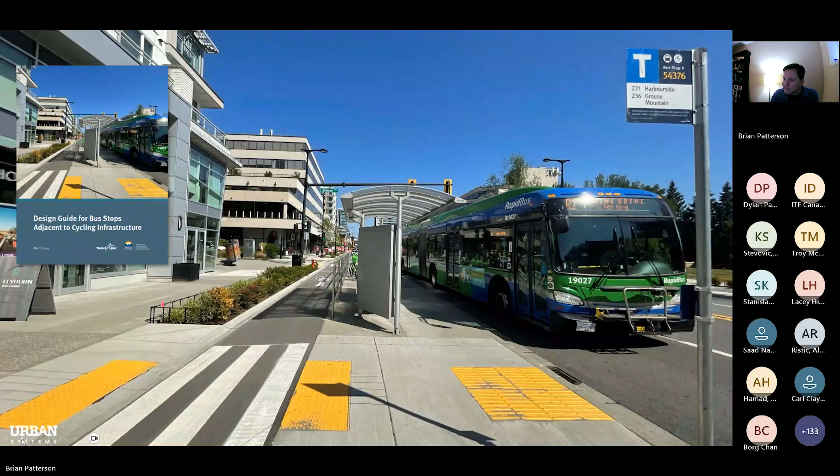As planners and designers, we recognize that transportation systems need to meet the needs of people with a diverse range of physical, cognitive, intellectual, psychological, and sensory abilities. This has led to the growing implementation of cycling infrastructure intended for use by people of all ages and abilities, including children, seniors, and people with disabilities.

As I mentioned, this has resulted in the implementation of island platform bus stops across Canada. But as noted, this has introduced complex challenges and created barriers for people with disabilities, including people with sight loss, but all types of disabilities.

Part of the impetus for the design guide stems from a 2020 decision by the BC Human Rights Tribunal, which determined that by installing island platform bus stops, there was a complaint against the City of Victoria, and the ruling was that the City of Victoria discriminated against the complainant and members of the Canadian Federation of the Blind who were looking to use transit in the City of Victoria.

There were a number of key issues raised in that ruling. The two main issues were concerns that people with sight loss were not able to reliably sense if a cyclist was approaching, and secondly, that people with sight loss don't have certainty that a cyclist has stopped. Those were the two overarching issues through that ruling.

Essentially, with the design of island platform bus stops, the complainants were saying that their ability to use transit had been taken away because people were so afraid to cross the bike lane to access the bus stop.

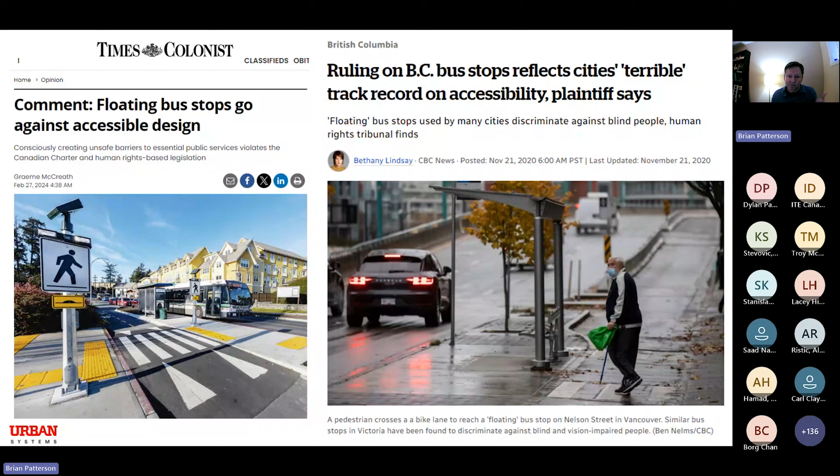In response to that ruling, the City of Victoria was directed to install pedestrian-controlled audible flashing lights. But the ruling recognized that this was not the full answer. It responded to this particular case, but this is why the design guide was needed, so we could look at this in a more comprehensive manner.

When we're looking at why this is needed, we often hear: why are they needed? Can't buses just stop curbside like they currently do? Can't we just drop the bike lane? But I think the reality is we do need to find solutions that work for everybody, including people with disabilities and people who cycle.

This is an example here. I was cycling with my son last year, and there was a bus stopped here. Our options without an island platform bus stop were to either wait for the bus or weave into traffic on a busy arterial road, which isn't safe, particularly for children or for people who aren't comfortable cycling. So we're trying to find solutions that work for everybody.

So the design guide—again, we won't provide too much discussion on the design guide itself, but a quick summary of what was included in it.

It included a wide range of treatments. There were 45 recommendations overall to address a number of issues and challenges. You can see some photos here, things like tactile directional indicators, secondary bus stop ID poles, having enhanced signage, and then some optional treatments like actuated flashing beacons or RRFBs.

So we had a number of different typologies or configurations for island platform bus stops, and for each one we identified some core or required treatments, and then some optional treatments, which might be things you would consider in areas with higher risk or higher conflicts between people cycling and people trying to access transit. So it provided, I think, a pretty comprehensive toolkit of options for practitioners to consider.

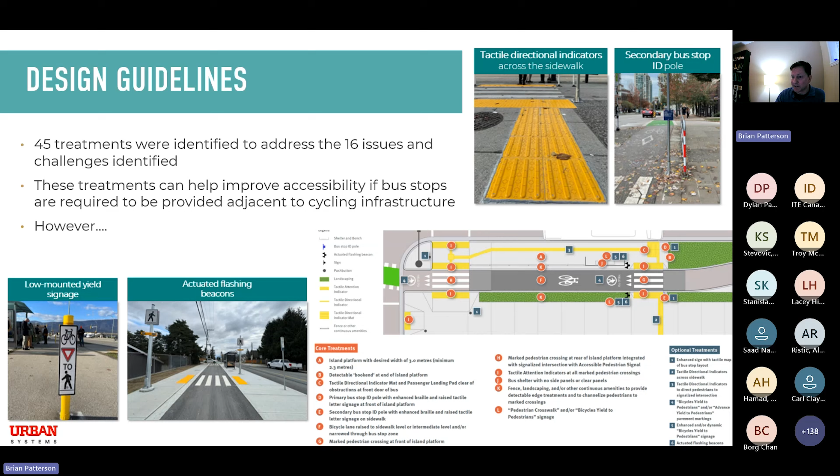However, the study, as I mentioned at the outset, did not fully address all of the issues identified. And the elephant in the room I spoke about is that there really are still two key issues remaining, and these came out of that HRT ruling in 2020. That involves really having certainty for a person with sight loss, knowing if a person cycling is approaching, and knowing that that person cycling has stopped.

So while the design guide provides a range of tools to help improve behavior and compliance, those two key issues still remain outstanding. The guide acknowledged that and recognized it's a first step, but that further research and pilot projects are required to learn more, to test out new technologies or new ideas, and to see how we can address these issues among others.

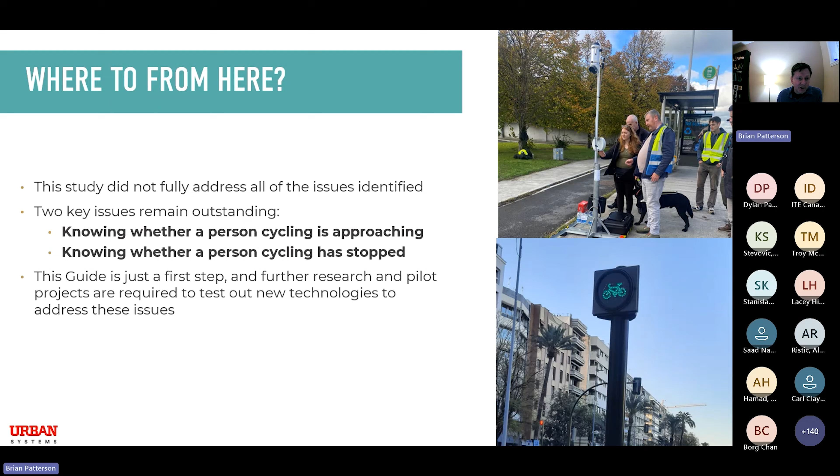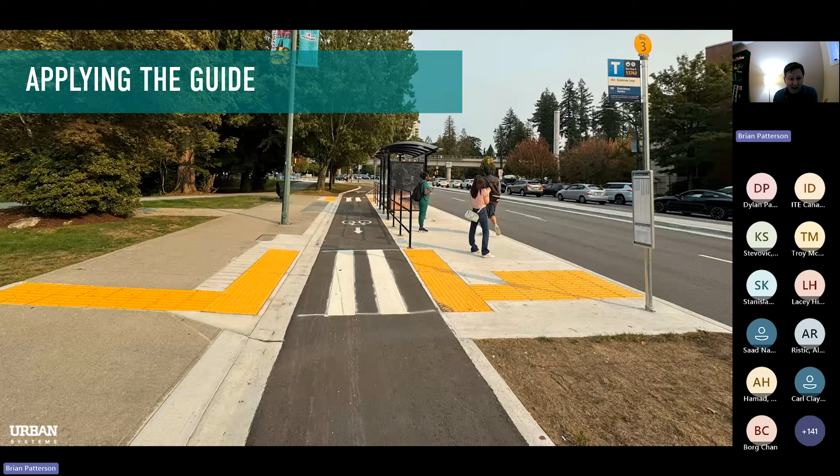So lots of great elements, and kudos to the city of Coquitlam with this design. We've seen a number of other similar examples taking the spirit of the design guide. But when it comes to some of the other emerging ideas and technologies that are out there, this is a question we want to explore throughout this webinar.

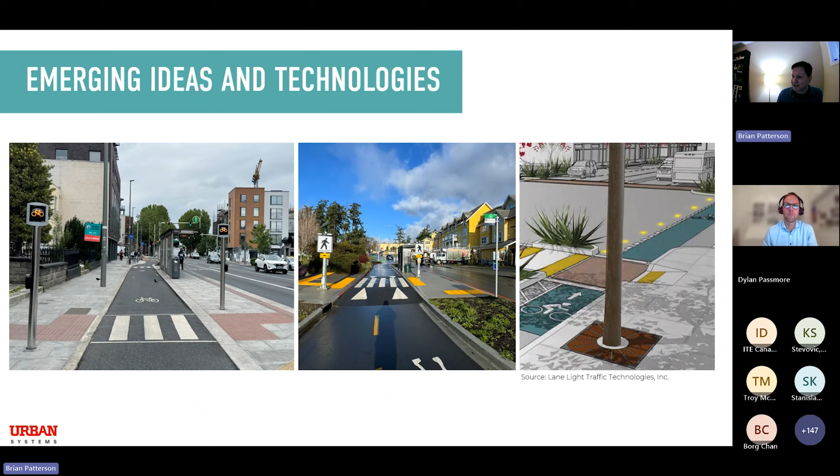Or there's flashing actuated beacons, or RRFBs, which again came out of the HRT ruling. And then a number of other ideas that some communities are exploring. I haven't seen them in practice yet, but things like inlane lights or dynamic or enhanced flashing signage. So there's consideration for some of these technologies, but maybe an overarching question is: is this too much, or are we over-engineering or over-designing with some of these types of technologies? These are things that, again, we're learning as we go.

So before passing it on to our panel of speakers, some of the ideas we'll be exploring through the webinar today in each of the various presentations include learning about what the latest research says, what we've learned from people with disabilities through engagement, and recognizing that engagement continues to be really important. Even though we have the design guide now, that doesn't replace the need to engage with people with lived experience through the planning and design process. We'll be talking about context-sensitive approaches, particularly with some of those optional treatments: how do we address conflicting needs, and how have designs evolved to reflect lessons learned?

What is the role of technology, like bicycle signals or RRFBs? Looking at education and awareness, and broadly, what guidance is still outstanding or still lacking. So those are some themes we will be exploring.

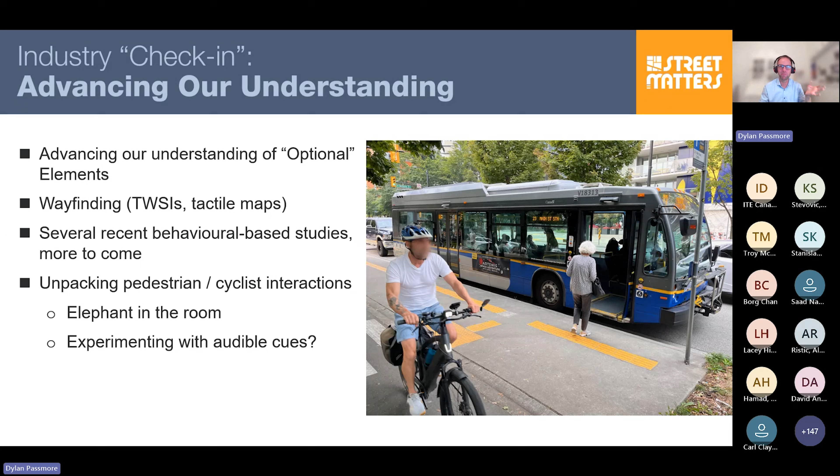In the guide, we were really putting a spotlight on the importance of edge delineation, of defining space maybe better than we have in the past. With that, also talking about designated crossings, how to deal with those, mark them, but also providing the appropriate warnings. That basket of design thinking is getting more and more traction. I'm seeing more and more designs out there these days, like Brian was showing, that are clearly paying attention to those nuances.

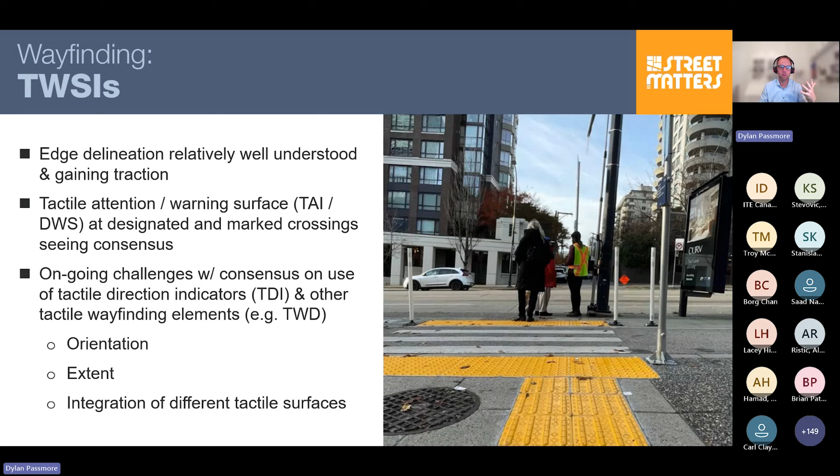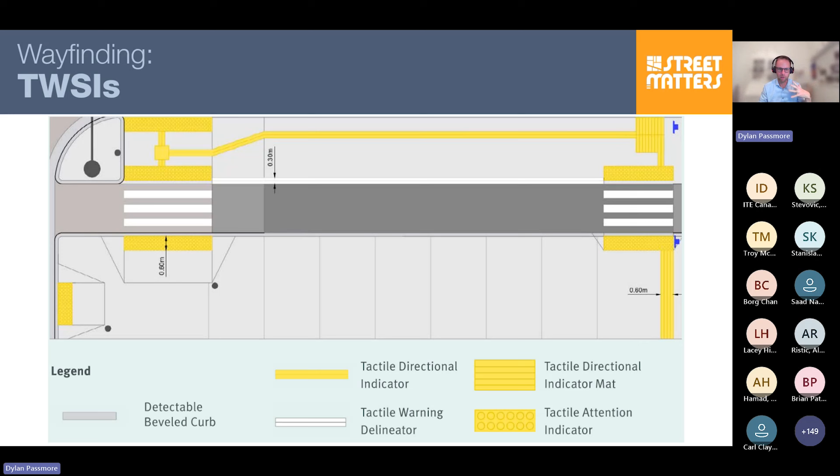I'd say the space that is still kind of up in the air and we're still trying to figure out relates to a lot of the other basket of tactile features, particularly direction indicators, which we talked a bit about in the guide, but how to, in a North American context, orient them and how extensively to use them. There's not just the directional indicators, but others like the trapezoid developed down in San Francisco a couple years ago. We talked about all of this in the guide, but framed it up as optional. It's really an area that's still unfolding, and I still see a lot of challenges with leveraging these tools. So I'll leave it at that.

The other wayfinding piece that we floated in the guide and tested out a bit through the pilot studies was this idea of tactile layout maps installed on the bus ID pole. Not talking about Braille, bus stop number and route information, but something that actually communicates the layout of the stop in a tactile way, because they vary hugely.

Our feeling at this stage is that it's been received as an interesting idea, but with kind of lukewarm reception, I'd say. On the user side, we struggled a bit to come up with something tactile, like a tactile language, that explains the layout in a simplified way that wasn't too complex, but it's a new language, so it takes a bit to understand these panels. Then on the practitioner side, it creates a real challenge in terms of asset management. Every single one has to be custom designed and maintained. If it gets vandalized, or the location of the sign and its orientation is really important, any changes to bus stops, which can be pretty frequent, require a new sign. So there's that practicality to it as well.

The other thing I want to touch on is this idea of a typology of different stops, which we included in the guide. We call it the conventional island platform, where you've got a platform that's sort of full width - not in this image, but often the shelter would be located out on the island, and there's enough room for a ramp to deploy from the bus, and someone using a wheelchair to access that ramp.

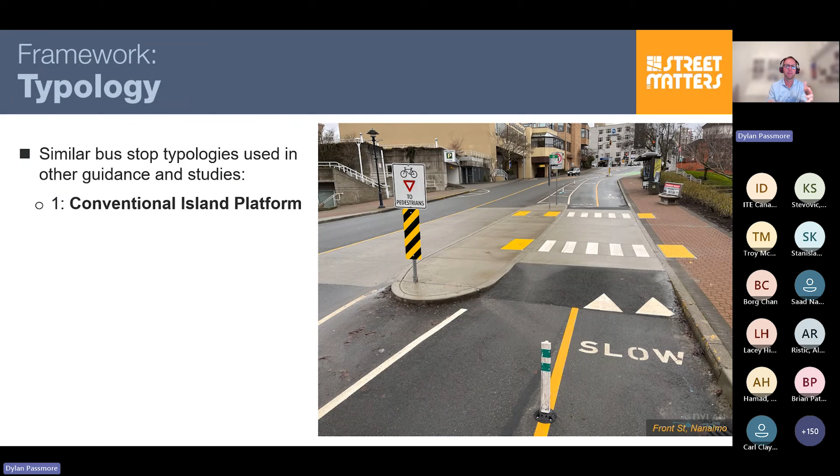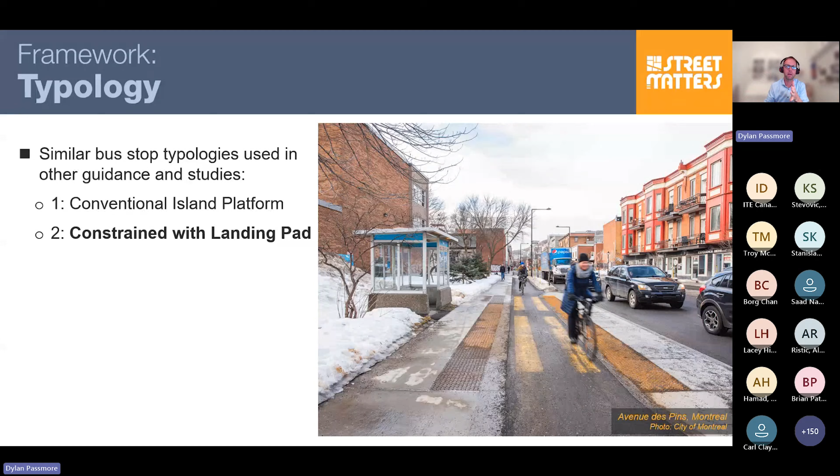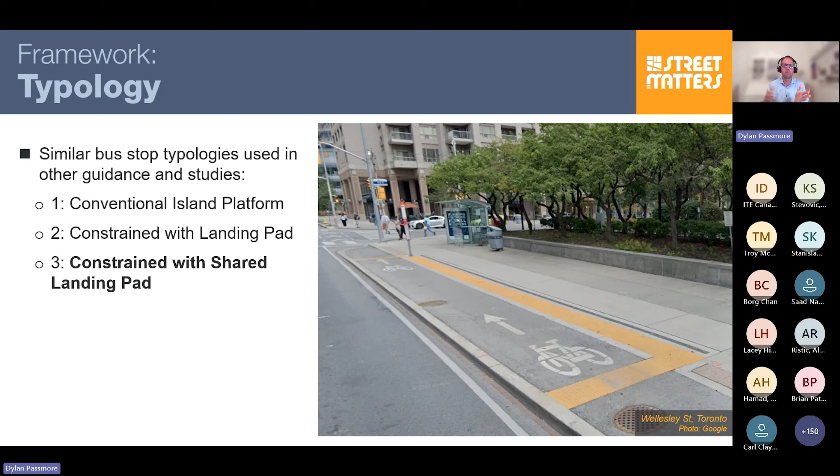So there's that. Then there's more constrained scenarios, which is an example from Montreal. Bartek's going to talk about that a bit later, but where you only have space, say, for a step-out area, or the ramp to deploy from a bus, versus an uber constrained scenario, like you see many of these around Toronto, or Copenhagen for that matter, where someone stepping out of the bus is stepping into a raised protected bike lane, and vice versa, versus integration of a stop with a multi-use path.

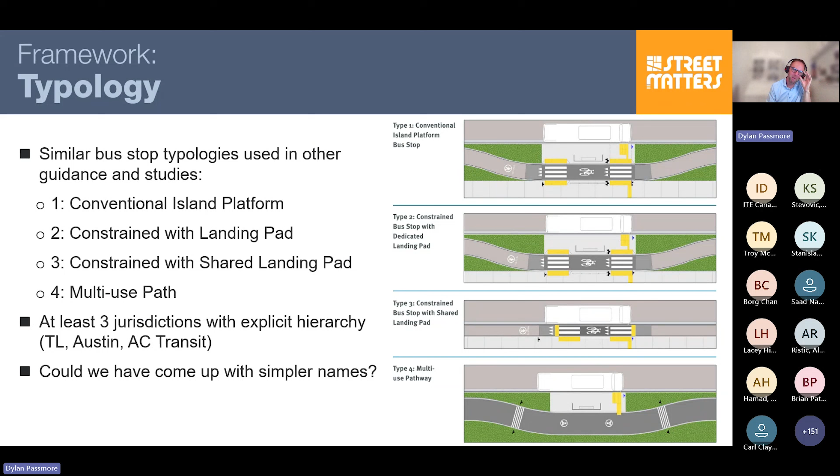And these broad four categories, that's how the guide was framed up, but we're also seeing very similar typologies used in other design guides, and even research and studies are often framing up findings with a very similar typology. And so I also really feel like this language, or this understanding of how we talk about island platform stops or floating bus stops, there's a bit of a consensus growing that these types are pretty fundamentally different from each other in terms of how we think about how to design them, and also about how people use them. I'll just say in the guide we probably could have come up with better names, simpler names for these types, but I'll get to that in a second.

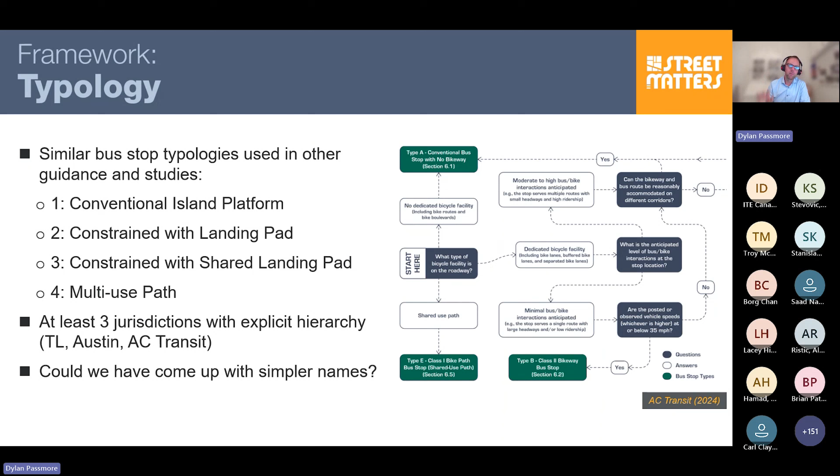So I'm just going to also touch on a few interesting studies that came out right around the same time as the design guides. The first one I want to mention is at Massachusetts DOT. They funded a look at a bunch of floating bus stops. They were looking at LiDAR data to track movement and speeds in the area. And one of the initial observations they made is a lot of the stops out in the field today don't look alike. There's a lot of inconsistency. And so interestingly, they framed their findings around a really similar typology. They just called it full width platform versus partial width platform versus no platform at all, i.e. the Toronto scenario I was just talking about. So similar typology to the TransLink guide.

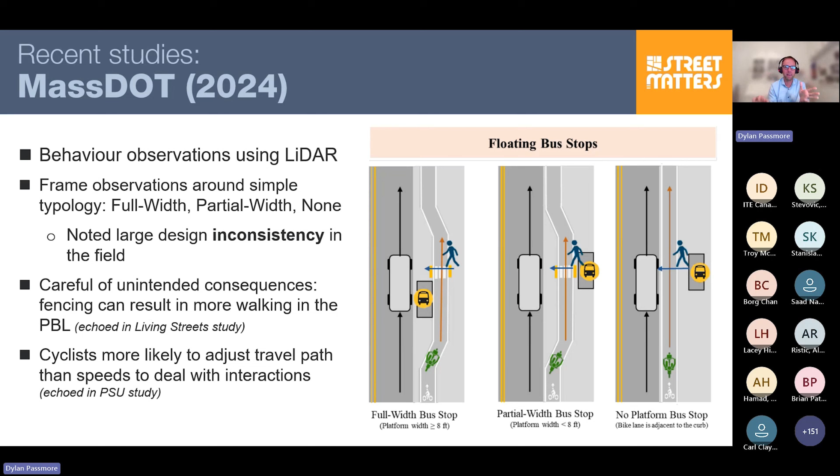Just a couple things that I thought were interesting coming out of that. One was they were noticing a lot of the stop designs that had a lot of fencing and those kinds of obstructions were resulting in a lot more walking in the protected bike lane. This is echoed in a Living Streets study I'll talk about in a second. And the other thing they were noting is that cyclists were much more likely to adjust their alignment, their travel path, in dealing with interactions with pedestrians than they were their speeds. So that's touching on a little bit of the complexity of the behavior that we actually see at these bus stops. So that was echoed by a Portland study here.

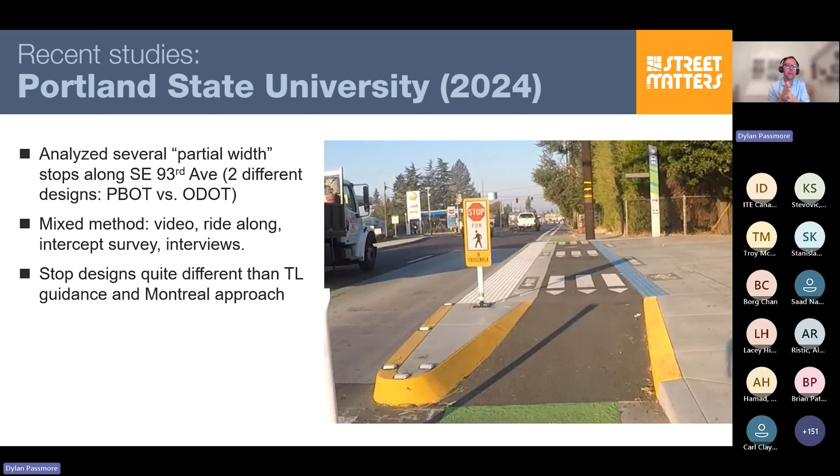So I'll just talk briefly. There's an interesting PSU study that also came out around the same time. They looked at a single corridor with a bunch of stops, and they were all this kind of partial width type. If you look closely, it looks a little different from the Montreal case. Oh, and the other thing that was kind of interesting, this corridor actually crossed a jurisdictional boundary. So this was what a bunch of the stops looked like, and this is what a bunch of other stops looked like. So half of them were city design, the other half were state design.

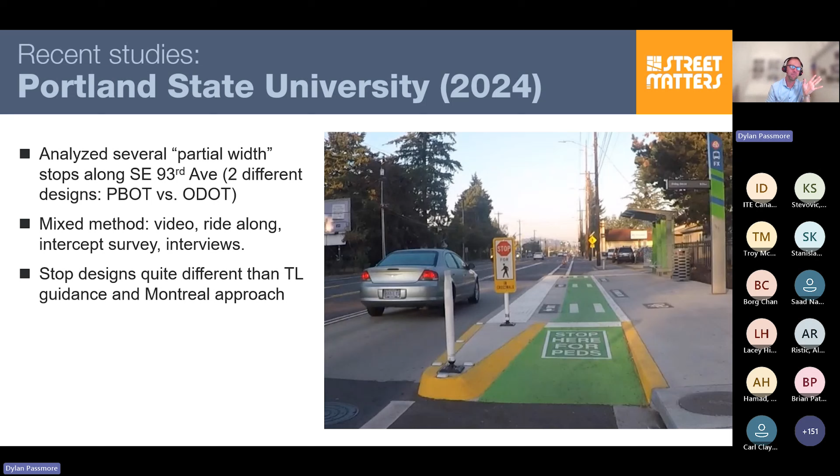But anyway, one really interesting thing for me that I've been wondering about for a while with this type is where are people waiting and standing? And that was one of the big findings here, that people were in fact waiting in the sidewalk area where the shelter and bus ID pole, all that transit furniture, is located. So that for me is good and reassuring, because that was certainly the intent with how we framed it in the TransLink guide.

Another thing was the bus operators were observing people with mobility aids sometimes struggling with the TWSIs, traversing them. That's also something that was really back of mind for us when writing the guide, and sort of a cautionary note with ideas of really blanketing these platforms with especially directional indicators, that there might be some trade-offs and some impacts for people with mobility needs.

And then the other thing that was interesting to me, bicyclists were shown slowing down in response to their context. So, if there were a bunch of transit riders present, they noticed a drop in cyclist speed. If there was a big bus at the stop, the speeds drop. And so there is this kind of thing that happens, I think, at this type of stop, the more constrained, like that Toronto example, that's a little different from the full width design approach, where that bus, its presence is much more felt.

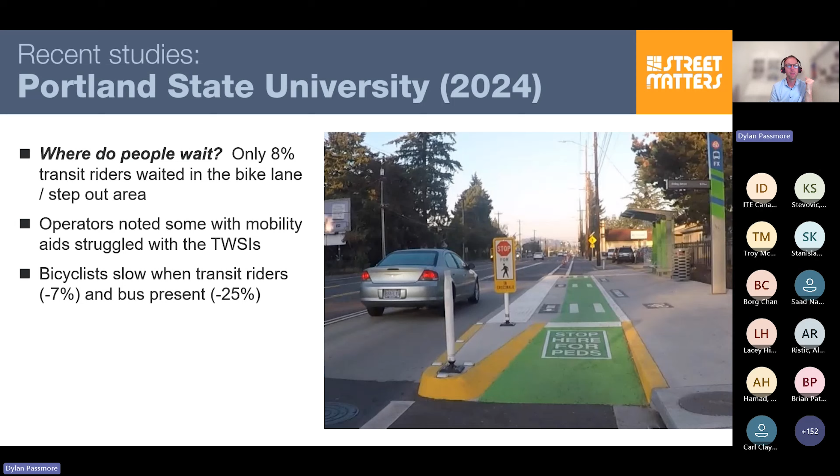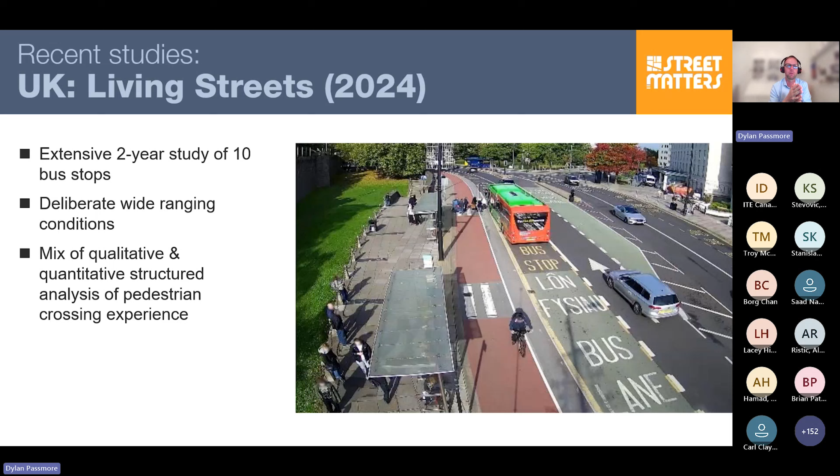Okay, pivoting to a UK study done by Living Streets, super interesting, rich study that happened over 2 years. They looked at only 10 stops, but did a real deep dive. Really interesting mix of qualitative and quantitative. Real quick, I think the thing that was interesting for me is they really did a good job of unpacking just how complex behavior is at these stops.

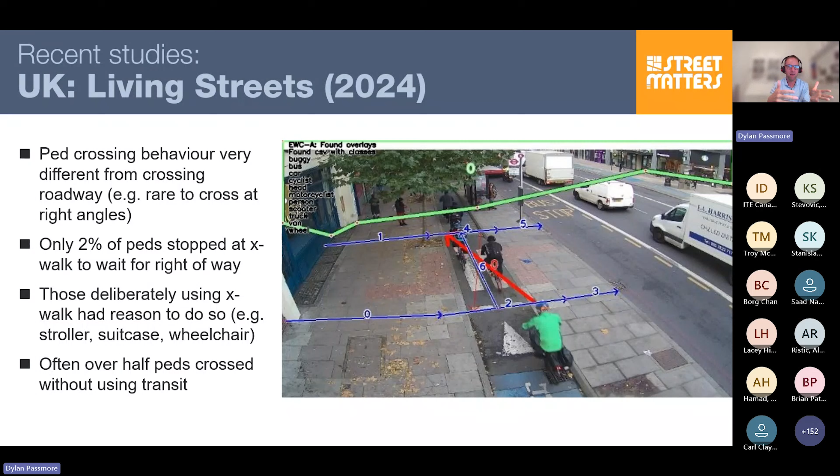And they highlighted that it's really rare to see somebody cross a protected bike lane at a stop like this in that sort of traditional use of a crosswalk that you would think of, someone crossing a roadway. Rare for someone to cross at right angles. Rare to see someone come up, wait, look for a gap, cross. And they included a bunch of traces in their report that really hammered that home, just how much complexity is going on here and just how complex the behavior is as a result.

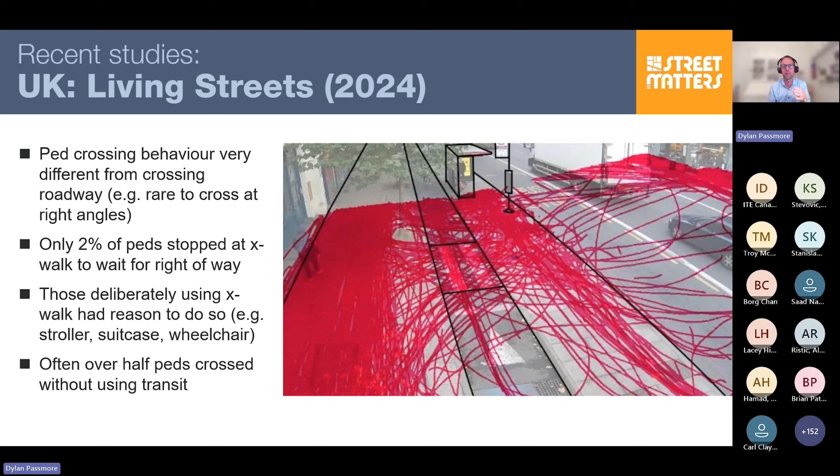They even noted that at a bunch of the stops, more than half of the pedestrians crossing the protected bike lane weren't even crossing to access transit. Of course, a lot of these stops are located near an intersection, and so they highlight one example where people are just interacting with the stop and the bike lane within the vicinity of the floating bus stop, but to cross the street or to have a look down the street. So that was, for me, a bit eye-opening.

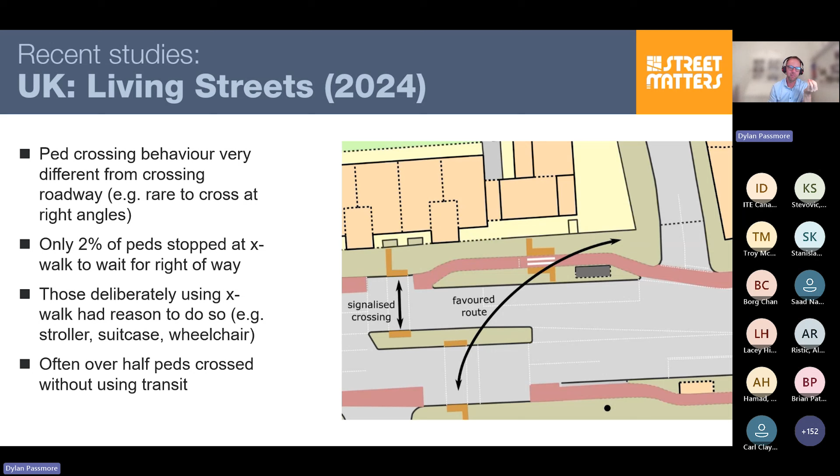And so one thing that they really underscored is just how much context matters. And they framed it as busyness and complexity being two features that really create unique conditions. Locations where we have really large volumes, frequent crowds of pedestrians, groups of pedestrians, say frequent transit service, pedestrians exiting shops, talking with friends, all that adds complexity. A two-way protected bike lane also adds complexity to pedestrians. And for a pedestrian with vision disability, this increasing complexity really compounds their struggles.

So the researchers tried to really carve out these busy and complex locations and suggest identifying those and treating those as a unique condition, but also super important by virtue of being really busy. And so I think for us as practitioners, maybe thinking a bit about identifying those locations, and maybe those are the locations where we really need to be talking about some higher order interventions, acoustic cues, beacon signals, all that stuff that Brian was starting to talk about. Maybe that's the context where those start to make sense.

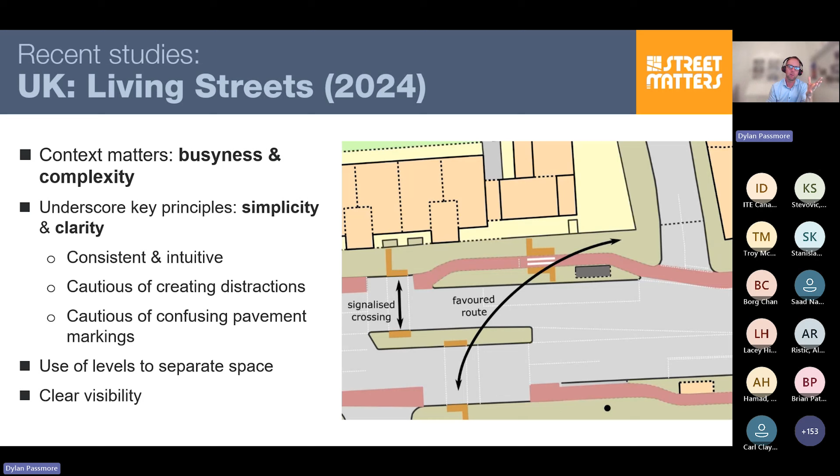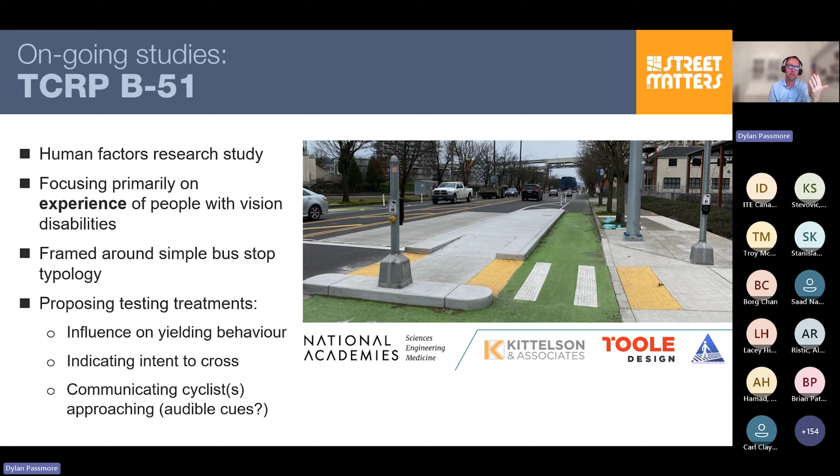Real quick, I'll just mention there is an early stages, but ongoing study right now, TCRP B-51. I'm involved in that, and it's really focusing primarily on the pedestrian experience, especially people with vision disabilities, and trying to test out a whole host of treatments to really unpack behavior, yielding, indicating intent to cross, those sorts of things. So stay tuned for that.

So I'll just wrap this up to mention we're aware there's a couple of cities, so City of Vancouver, that are looking at, does providing an audible cue have merit? Does it seem like that could have some benefits? So City of Vancouver are exploring some low-tech solutions. They've been calling it, I think, the clinker clanker. So something that could be installed in a bike lane, and you get the clank as somebody goes across it. And the idea there is something low cost, low maintenance, scalable. Of course, the trade-off with that is minimal control over volume and no ability to turn it on or off as needed, that sort of thing.

So we are aware of another jurisdiction looking at a more high-tech solution, and it might involve some kind of active or passive detection of approaching bikes, installing some speakers to make sound, maybe leveraging APS technology in a way that you could respond to ambient noise levels, maybe only activate the system as needed. Of course, the trade-off with that approach, though, is it's going to be more costly to install, harder to scale out across the city, and it's probably going to have some higher maintenance requirements.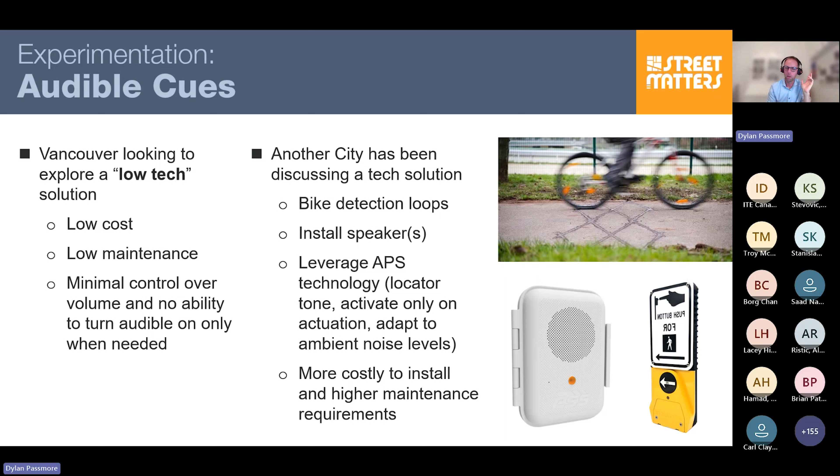So could talk about this a lot more, but I just want to let you all know that people are starting to think about these things and explore them, and I think it's super, super interesting. So I will wrap up with that. Thank you so much.

Great. Thanks, Dylan. Really appreciate that, sharing some of that research and showcasing the complexities that we're looking to address here, and really how it comes down to human factors and behavior, and it's very nuanced. So I'll pass it to our next speaker, Katarina Stevovic. She comes to us from TransLink, Metro Vancouver's multimodal transportation agency. Katarina brings over a decade of dedicated transportation experience in the public sector, and she currently manages the major road network in Metro Vancouver. And she'll be speaking to some key insights TransLink has had since the design guide was published. So over to you, Katarina.

Great, thank you so much. Let me just share my screen here. Okay. Give it a second. Awesome.

So thank you so much for those kind words and introduction. I have the pleasure to present all the work that we here at TransLink have done. I want to start with a quick overview of who we are at TransLink. We were created in 1999 as Metro Vancouver's Regional Transportation Authority. We oversee approximately 2,600 lane kilometers of the major road network. Within here, we encompass 23 local governments. We operate over 240 bus routes. We have 3 SkyTrain lines, 1 commuter rail, and a SeaBus. So we have a lot of good work that we oversee.

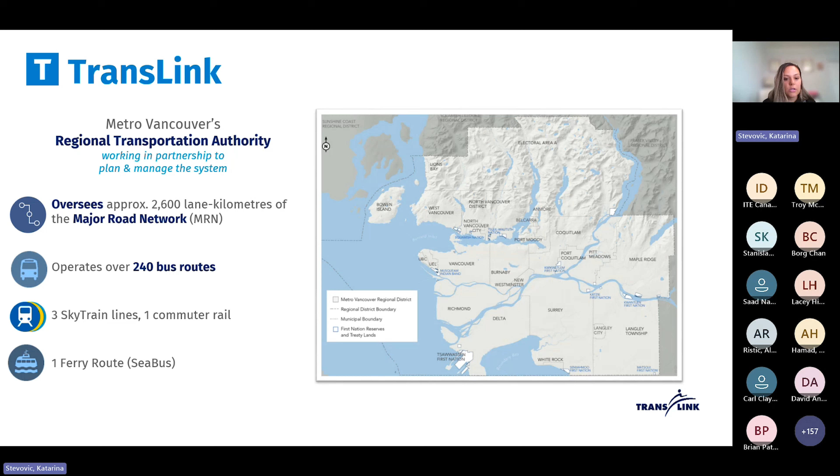So what have we really done since publishing the guide last April, and what does that really mean? Alrighty, so once the guide was completed, we really saw our role start transitioning. And this is really where a lot of the work started. As the guide was developed, there were some key themed areas for further work and development. And what we really wanted to focus on was getting consistency for how users would experience and expect to cross these facilities throughout the region. So if you're on a bus in one city or going to another, it should be roughly the same.

And with that, we saw that our role was really transitioning into facilitating and connecting all the dots. So we were working very closely with the local governments as well as our operating companies to help overcome some of the stuff. As Brian mentioned, this is not ideal. There's still a lot of work in progress when it comes to implementing and designing these features. So what we really worked on was making sure that all other design solutions were exhausted before this would be implemented. This is really key as a role to facilitate with our operating companies and local governments. So we would see if there were any opportunities for bus stop balancing, or a way to relocate some of the buses closer to intersections where it could be integrated with a signalized crossing instead.

And really, that is where we started noticing our focus on education and awareness. What we started noticing the most was if we don't start changing the behavior of what's expected here with this infrastructure, then it doesn't matter how good the design is, we'll still have some issues to overcome. And so what we ended up doing was working internally with our great marketing team to start really campaigning on the education portion. We piloted a couple bus stop announcements, which I'll get into, and also featured a good video where we were working with our local HUB, which is our cycling group as well.

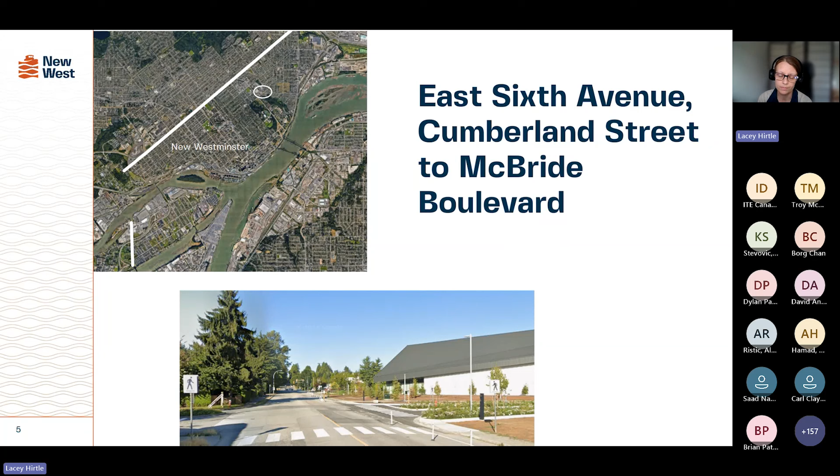This project came to be because the City of New Westminster had a civic facility called the Canada Games Pool that was being redeveloped into a new aquatic and community center, the Tommy Douglas... Aquatic and Community Center, which opened in 2024. Since opening, it has received the Rick Hansen Foundation certification for accessibility, as well as the Prix Versailles Award, so it's really a gem within the community.

One thing that's really important to the City of New Westminster is recognizing that one of the largest growing demographics in the city is older adults. So we have a real focus on making sure our civic facilities are as accessible as possible for all ages and abilities, which is foundational to this project.

This project is the offsite rebuild as part of the new Aquatic and Community Center, with a corridor length of approximately 330 meters. It entails traffic safety improvements, a new full signal at the intersection of Cumberland Street and East 6th Avenue, improving the existing transit stop outside the civic facility, and rebuilding a bidirectional bike lane.

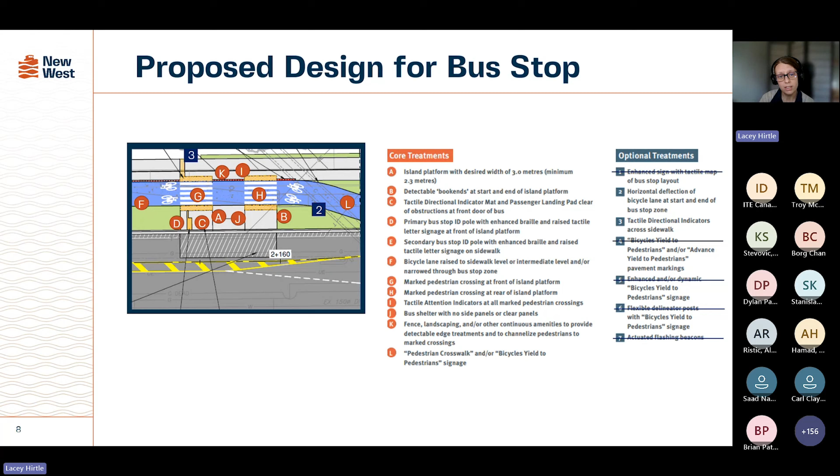What was different about this project is we were open for influence. So we had the proposed design, but we were open to being influenced about what that ultimate design would look like based on feedback from people with lived experience. So what did that look like for this project?

Well, we knew the primary concern, as Brian highlighted too, is that people sometimes can't hear cyclists approaching. But when we talked with CNIB, we heard that their primary concern was actually a behavioral piece—cyclists not being willing to stop and give right of way to people crossing the bike lane to get to and from the bus.

At this point I didn't really know how to do a site visit with people who have different abilities, so I reached out to a few colleagues, and we landed on hiring an orientation and mobility specialist. I got a crash course in what orientation and mobility specialists do—they're key to providing that comfortable, safe environment for people with different abilities to come out and be on site, feel comfortable, navigate the space, and provide feedback.

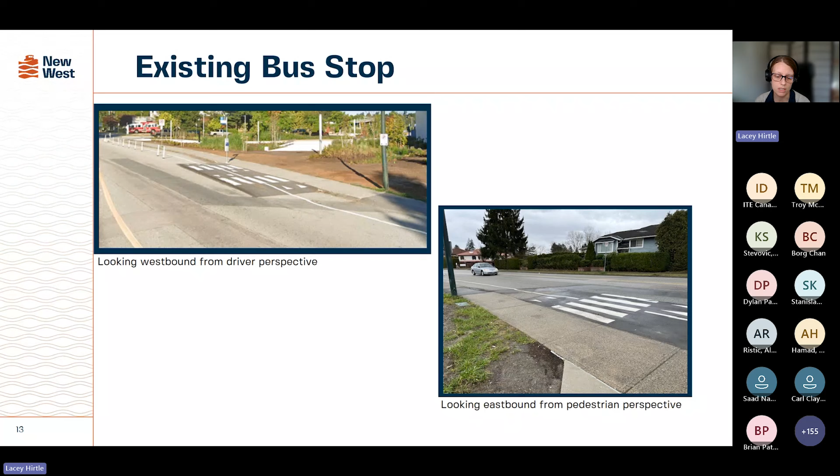I don't have a photo of the bus stopping here and deploying the ramp, but you can use your imaginations—the ramp, when deployed, blocks the bike lane, and cyclists do have to stop. This was the key point that was feedback for us during the design, and our consultant took this information away to create a tailored design based on this feedback.

I'm going to start in the lower left-hand side of the screen and go clockwise. The bus stop area and bike lane continue to overlap. The bike lane is raised through the bus zone, with horizontal deflection on the approach. We have a 3-meter bidirectional bike lane reduced to 1.8 meters through the bus zone area, meaning it's one-way for cyclists, and the right-of-way prioritizes pedestrians going back and forth.

Going clockwise, the transit shelter placement was really key, wanting it adjacent to the sidewalk that Katarina spoke to, about being consistent with where other bus stops are in the region. That was feedback we heard from community members. We also added a tactile indicator to provide direction to the civic facility.

You'll notice there's a small break in the tactile indication. That was because we heard from people who want to traverse the sidewalk east-west and don't want to have to go over it, especially if they're in a wheelchair. It just provides a more level of comfort for them.

You can see the delineation of the bus stop area with the concrete versus the landscape bookending. Lastly, from people with lived experience and orientation mobility specialists, we learned we did not need to provide tactile domes at the back door of the bus stop, since people are trained to only use the front door. So we focused those tactile pieces on the front door and the path to and from the facility.

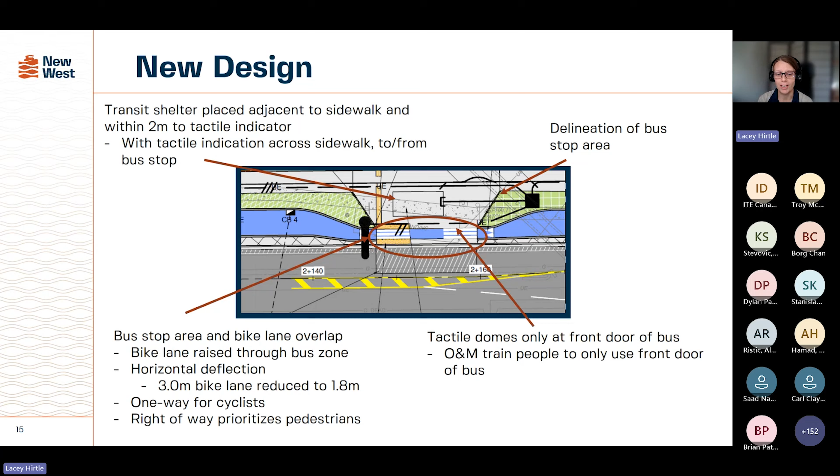That's been our experience in New Westminster. This project is set to begin construction this fall, and we'll be able to report back in the future on how that's going. Thanks.

Wonderful, thanks Lacey. Really appreciate the perspective on how you engaged with people with lived experience and how that informed the design, with some great lessons learned moving forward. It really echoes what's in the design guide we mentioned—the design guide shouldn't substitute engagement, it's a starting point to then engage and come up with locally based solutions. Some really great lessons learned there.

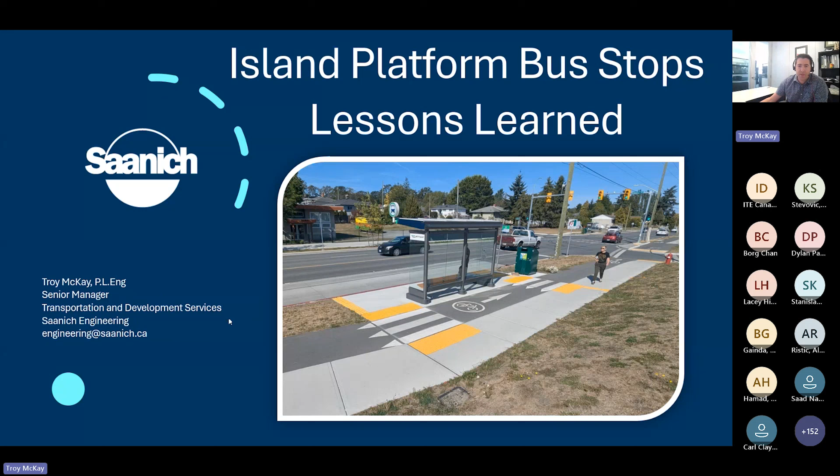Great, thanks Brian. Good morning, good afternoon for those joining from across the country. Pleased to be here to share our experience in Saanich, on Vancouver Island on the coast of BC—talking about island bus stops from the island today. We're the largest municipality in the capital region, just outside Victoria, adjacent to where that initial human rights tribunal ruling took place. So there's extra sensitivity for us being the neighboring municipality to Victoria, with the same transit operator operating in the whole region.

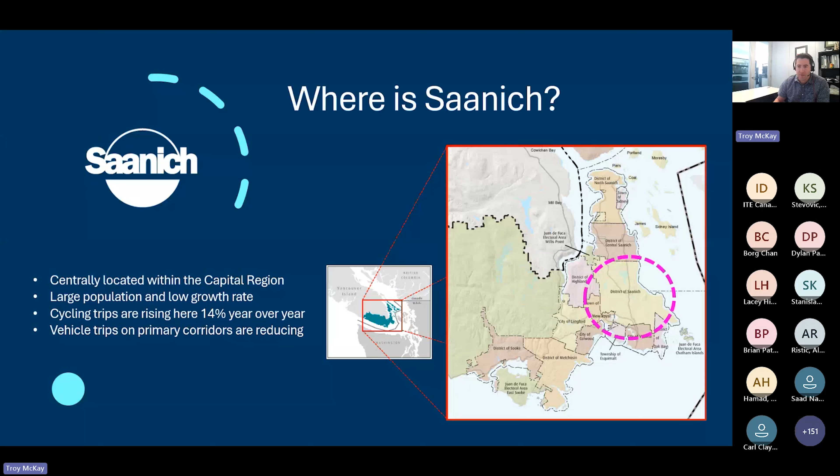In Saanich, we're seeing large rises in cycling trips, 14% year over year, while vehicle trips are relatively stagnant, actually reducing in parts of Saanich. That's a little bit of context. We're here to share examples of what we've built, for right or for wrong, what's on the ground in Saanich and what we've learned from that, and then we'll talk a bit about what we might be doing in the future.

We've just finished a project on the southern part of Shelbourne Street, where we've installed about a dozen floating bus stops, all of a similar design. We're in a very constrained environment where the property line is right at the back of the sidewalk—kind of a retrofit to an existing very narrow corridor. But we've applied many of the principles from the design guide, the tactile warning that both Dylan and Lacey have talked about. We have the shelters squeezed in there; you can see they're probably a little tighter to the bike lane than we'd like, but again, we're quite tight on space to make that happen.

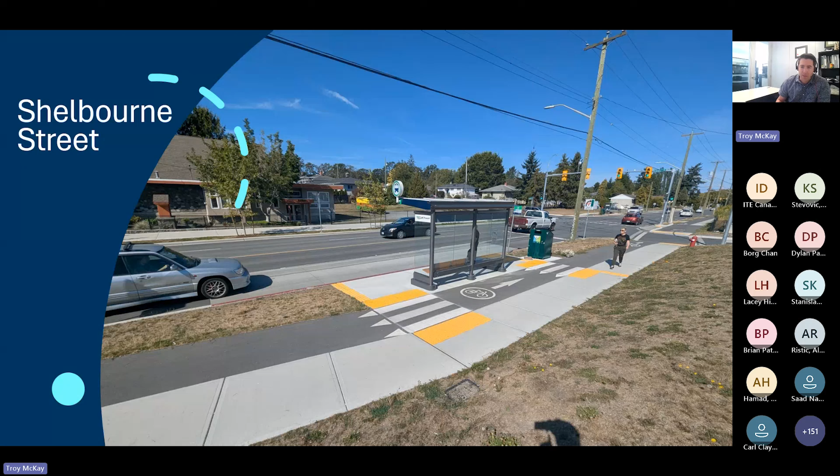We also have a bend out of the bike lane to make room for that shelter, and to provide a little slowing of people riding bikes past this space. We have the bikes-yield-to-pedestrians sign, which I see there's a question about in the chat. I have a preference for this sign versus typical crosswalk signage, as well as using the yield teeth at the crosswalks.

We've also extended, turning around from where I took that last photo, the tactile devices at the crosswalks crossing Shelbourne Street, so that users have a similar experience whether they're at the bus stops or at the adjacent crosswalks as part of this project.

This one's still finishing construction, on McKenzie Avenue, not too far from Shelbourne Street. It's being built as part of an adjacent development at University Heights Mall. This is quite a large stop, able to accommodate three transit vehicles at one time in this timing point layover. We have a little more space here, so a deeper island, again all level, with the tactile warning devices and the yield markings, and a yield sign facing the opposite direction. This is a one-way bike lane, a little uphill through this space.

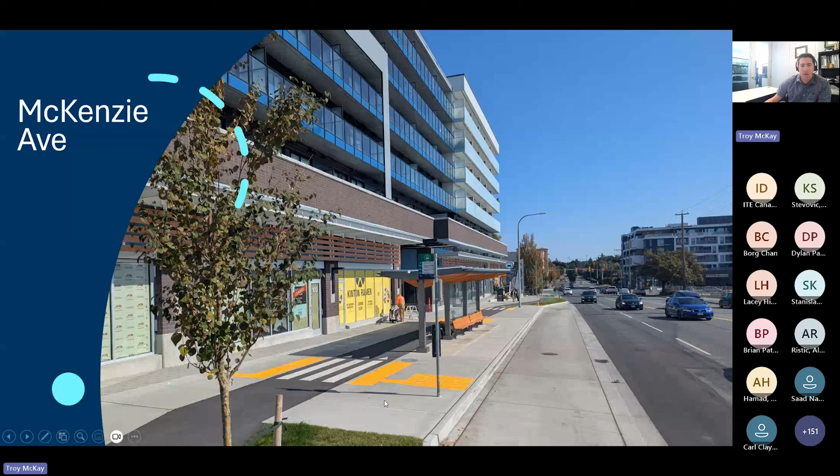I want to share that in many contexts in Saanich, and I think shared here in the CRD, this type of configuration where there's actually not an island is also an acceptable solution. The interaction between buses and cyclists is relatively low, and there's a trade-off: the bus pulls out of the through lane, blocks the bike lane, loads passengers, and carries on. Yes, there's some waiting from cyclists, but we find this an acceptable solution in a number of cases still in Saanich.

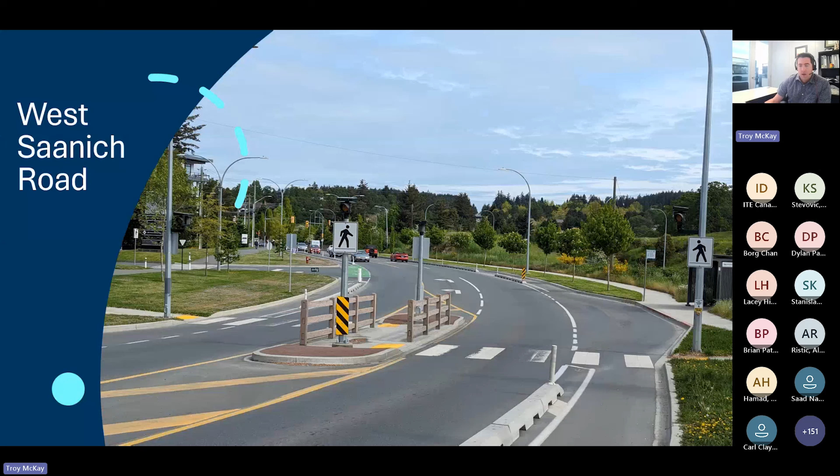On Gorge Road, this particular stop was part of the pilot projects used to help develop the guide. This is a two-way cycle path, with residential only on one side and an open waterway park area on the left of the screen. These are fully raised islands with raised crosswalks that connect, and the main feature here is the rapid flashing beacons, all integrated in one large crossing. There are three sets to cross: the bike lane onto the island platform, and then across the road crossing Gorge Road. This is probably one of the few deployments I know of where RRFBs actually reach the island platform bus stops.

We thought long and hard about a thoughtful way to do that, to comply with the early guidance presented by the Ministry of Transportation, and a requirement of our grant support for this project to comply with that guidance, which came right out of the HRT ruling, but also to be thoughtful about where RRFBs might actually be warranted in a typical transportation setting. So integrating them with the road crossing and the bike lane crossing was our solution.

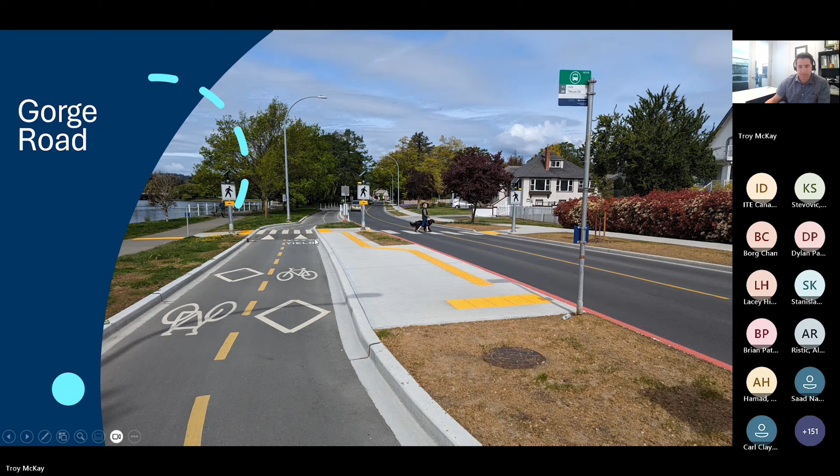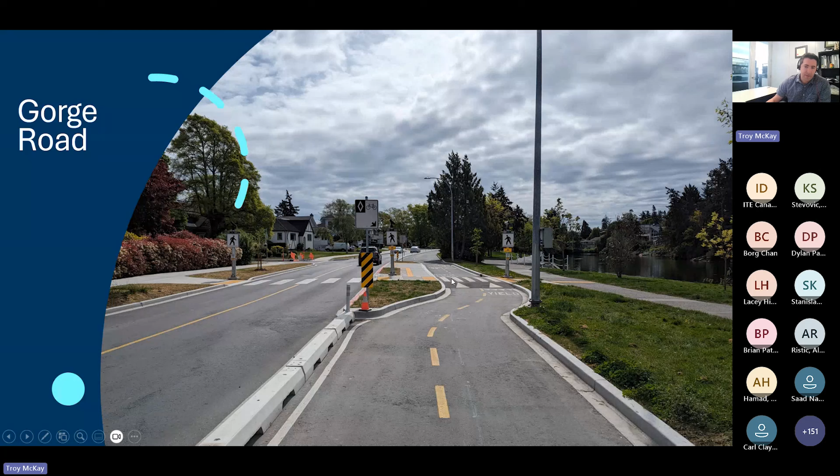We've also deployed lots of tactiles on the ground here, as well as yield markings and the word 'yield' painted on the ground in advance of the raised crosswalk where it crosses the two-way bike lane, along with yield teeth painted in front of the crossing.

We've also deployed the more standard tactile braille signs, which are a BC Transit standard, here as well to help support identification of the stop and where it may be.

We also have a speed limit establishment policy in Saanich, which is important because we always look at that as we deploy these cycling corridors and improvements, to make sure we have the appropriate vehicle speed applied to the road. That helps manage the speed of all users, vehicles and cyclists, in their approach through the island platform bus stop. That's one piece that doesn't get mentioned often, but it's also about managing speed, both regulatory and through geometry.

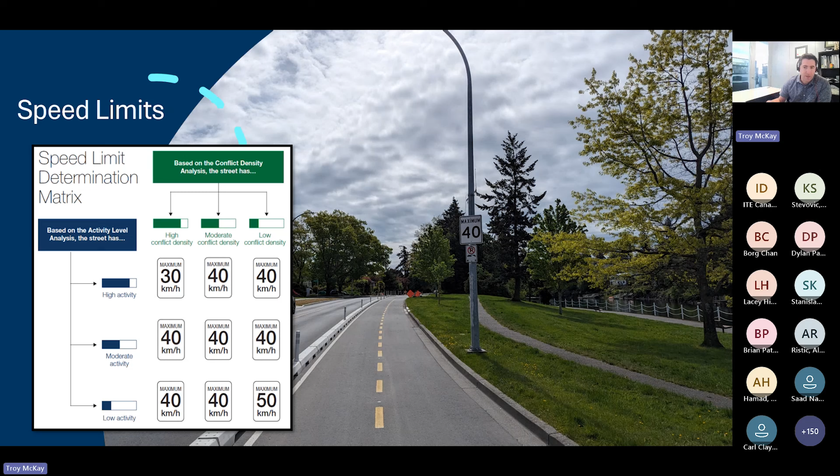On the engagement side, through the development of the stops on Gorge and Shelburne Street, we've had a number of site visits with our local members from the CNIB, and continue to receive feedback from them around the value or not of the RRFBs, as well as really good critical feedback on the placement of the tactile devices, and edge delineation, which we didn't have space for on Shelburne, but we've learned that's something we'd like to add in all projects going forward.

We continue to meet with them in person and have written communication with CNIB members. We've also had site visits with our local accessibility advisory committee here at Saanich, and we're happy to take other regional staff and local consultants on tours of the infrastructure we've built, to share those lessons learned on the ground and all learn together how we can improve going forward.

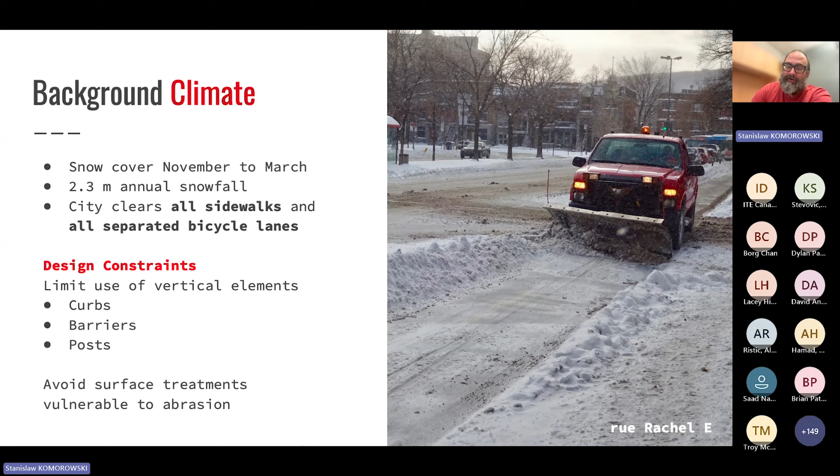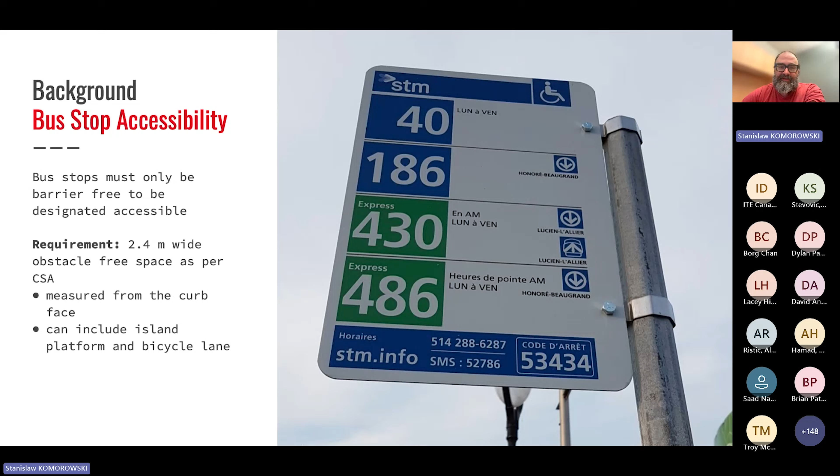Also quickly, as far as accessibility is concerned, our transit agency, the STM, designates some stops as accessible, but thus far this only really pertains to wheelchair access. So a bus stop is deemed accessible if there's a 2.4 meter wide clear space from the curb perpendicular to the street, which allows wheelchairs to maneuver. Tactile delineation and accessibility for visually impaired people is not considered, although it is our intention and the STM's intention to work on that and to improve it.

So we'll have a look at our platforms with raised bicycle lanes, which are by far the majority of our island platform bus stops. We've been building these for many years - we have hundreds of them around the city. And until recently, our design standard was pretty much what you can see here on the screen. So we were aiming to provide a 1.5 meter wide platform. Then the bike lane would usually be 1.8 meters wide through the bus stop area for unidirectional, and a 2.5 meter wide absolute minimum for bidirectionals. And there was no real tactile delimitation either on the platform or the sidewalk side.

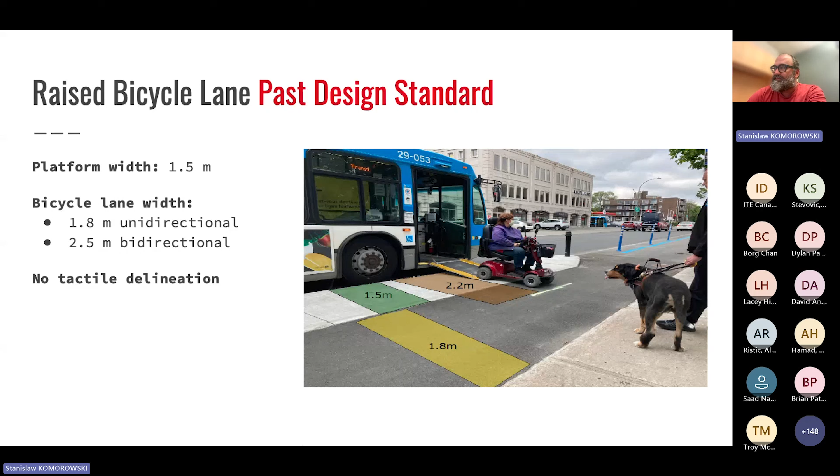So as of about 3 years now, this is our new design approach. After much discussion with our Universal Accessibility Advisory Committee, this is what we've come up with.

When the bicycle lane is raised, we lose basically the delimitation provided by the curb. So we compensate by using tactile warning indicators. In Montreal, we use cast iron indicators because those are the only ones that we know that can withstand our winters. So we put them on both sides of the bike lane, basically from where the curb height drops below 60 millimeters. So up to 60 millimeters is cane detectable. Under 60 millimeters, it's no longer cane detectable. So that's where we provide the delineation.

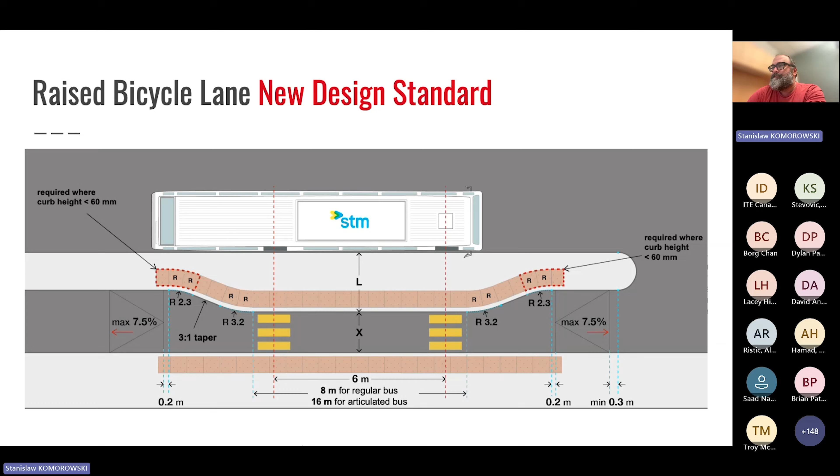Other things to mention, our target width for the platform is 2.2 meters, so that a bus ramp is about 1.1 meters long. So that's one ramp length plus roughly one wheelchair length before crossing the bike lane. That's not always possible, so we tolerate reducing the island down to 1.5 at minimum. And wheelchairs are actually welcome in bike lanes, so we consider that many wheelchair users will actually be interested in turning into the bike lane to roll in the bike lane.

The absolute minimum width for the bike lane through the bus stop area is 1.5. Below 1.5, we're concerned that larger format bikes or trailers could have trouble moving through the bus stop area. But the reduced width encourages people to cycle single file through the bike lane. So if a cyclist does slow down to yield to a crossing passenger, we don't want another cyclist passing them in the bus stop area.

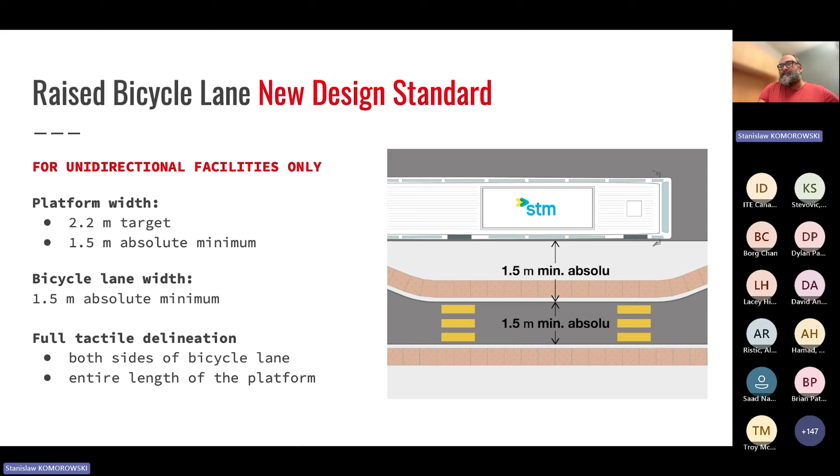So yeah, as I said, this is kind of an important detail. The ramp up to sidewalk level has to happen before the taper in the bike lane, to allow snow plows to go through. Otherwise, it might wedge the snow plow. And also, if there were a curb on that tapered part of the island, that little edge can actually be a hazard for cyclists. If a cyclist clips that with their wheel, they can actually have a crash.

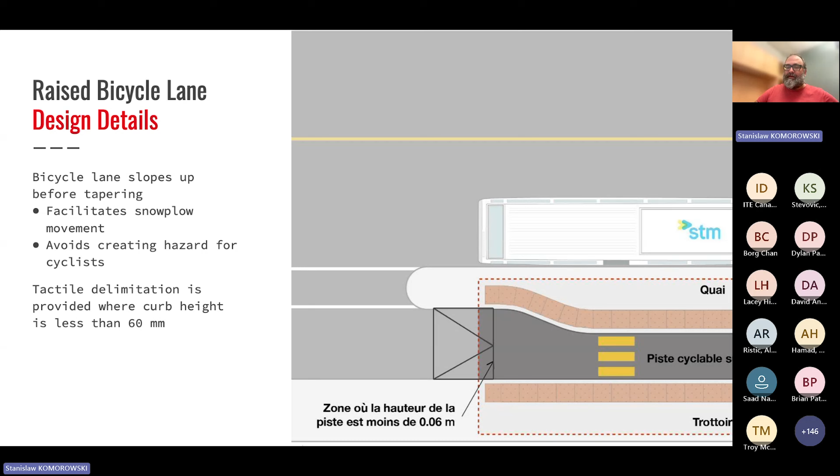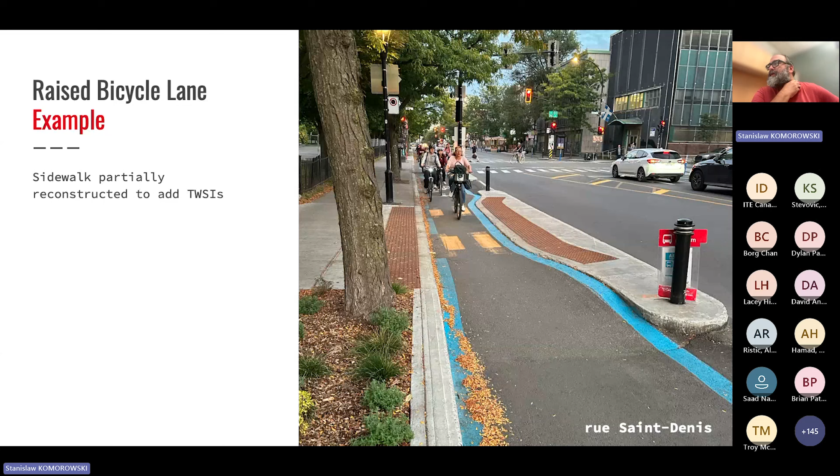And recently we came up with a new design. We found that the concrete tapers don't really serve much of a purpose other than visual. So we now sometimes build this taperless design. There's no hazard here for cyclists because everything is level, and it allows us to shorten the island by quite a bit. So you can see the difference. We go down from almost 20 meters long with a 2.5 meter wide bike lane down to 12 meters. This can be very useful in many circumstances when there are other obstacles on the sidewalk, such as a driveway, for example.

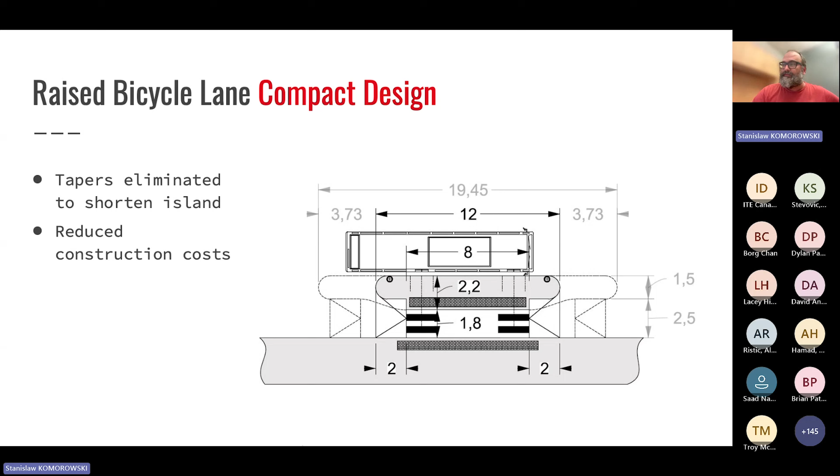As for our island platforms, when there's a roadway level bicycle lane, these do exist. They're not very frequent, but when the space is available, these are worthwhile because they avoid all kinds of expensive drainage work that results from raising the bike lane. So we don't have to modify any of the storm drains when we do this.

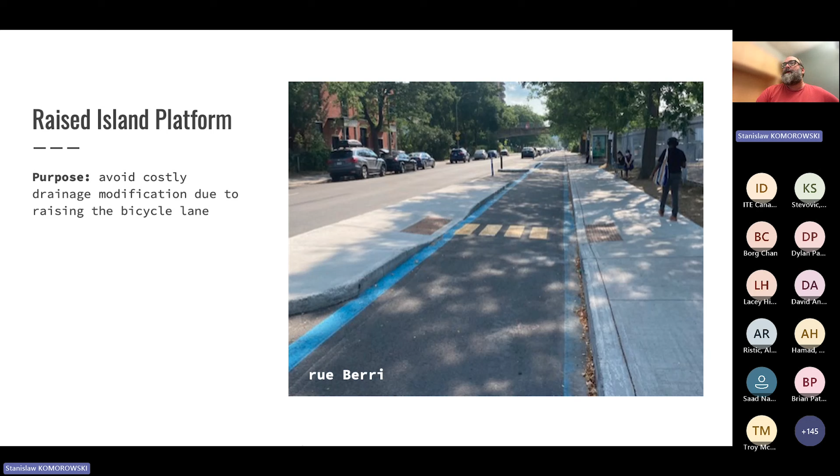So there's two ways that we do these. Either we do a curb cut at the back of the island, so basically at the back of the bus, that allows people to cross over to the sidewalk. And in this case, it's an uncontrolled crossing. In Quebec, uncontrolled crossings are always yellow.

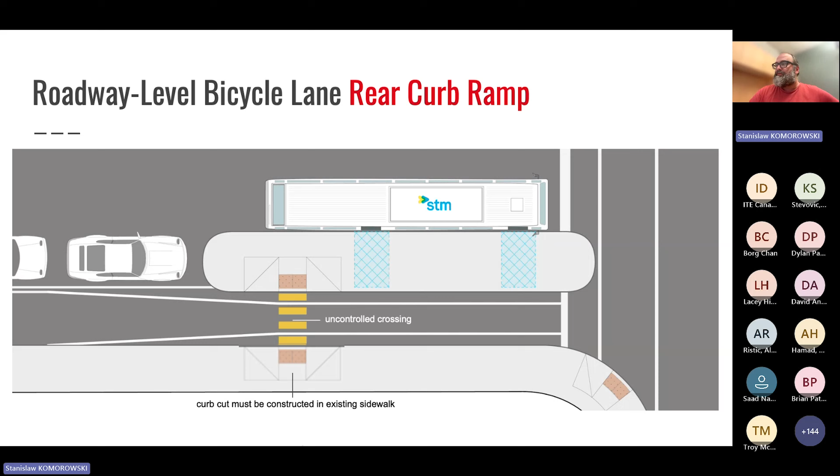Or the other approach is to do it at the front of the island, and then we can integrate that ramp into the traffic signals. So in that case, that becomes a signal controlled crossing. The advantage here is that we can also provide an auditory signal, so that can really help visually impaired users with wayfinding.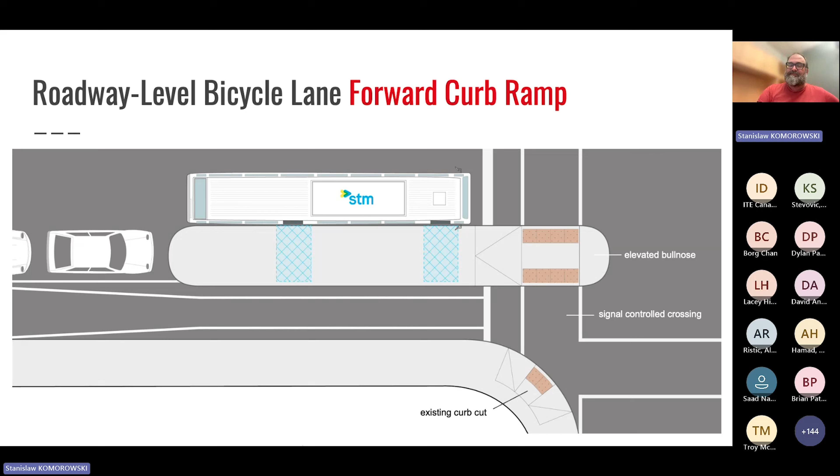The tricky part with these is that, unlike the examples we saw from Vancouver, we can't put any fences along the platform to prevent people from falling into the bike lane, because they are really hard to keep maintained in the winter. They prevent snow plows from properly clearing the island and the bike lane. So since we have no fence, we have to make the platform wide enough so that wheelchair users who are turning 90 degrees to get to the ramp don't fall into the bike lane. That means we need at least a 2.6 meter wide platform.

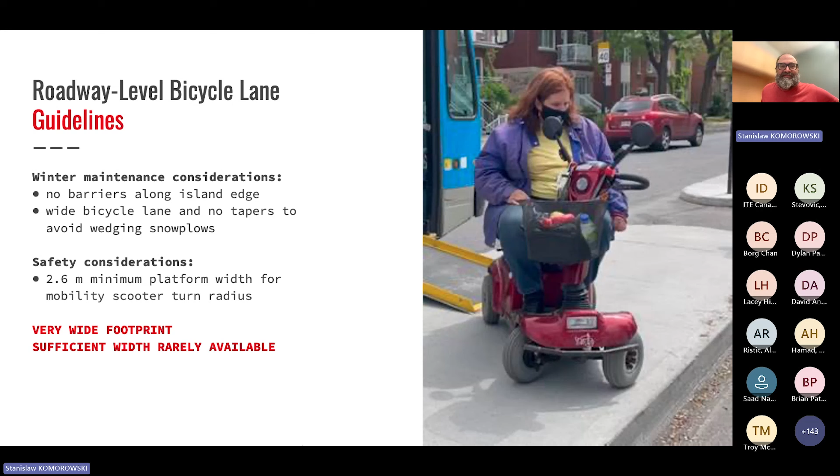And also, we can't taper the bike lane through the bus stop area, because that would wedge the snowplow. So as a result, we have a wide bike lane and a very wide platform. It's a very, very big footprint, and there simply aren't that many places in Montreal where we have the space to do this. So there are, but they're rare.

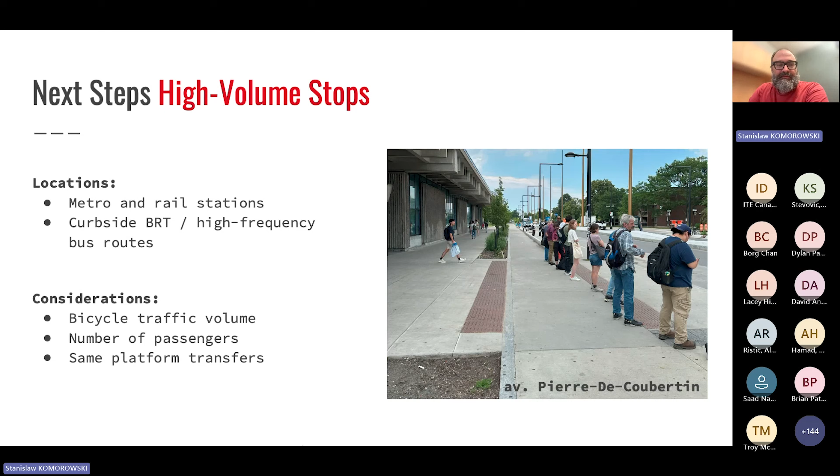We still don't have an official guideline for bidirectional cycle tracks that are appropriate for visually impaired users. What we're told by the community is that they find them more stressful than unidirectional bike lanes because there could be bikes coming from either direction. And also simply because the bike lane is bidirectional, the crossing is wider. So there's a much bigger space for them to cross to safely get to the sidewalk, or from the sidewalk to the island. So we're still working through how to design this in a way that will be satisfactory.

That being said, we do have bidirectional bike lanes that are in fairly low volume locations, that have much lower bicycle volumes than some of our unidirectional bike lanes. So we think that this is a problem we'll find a solution to.

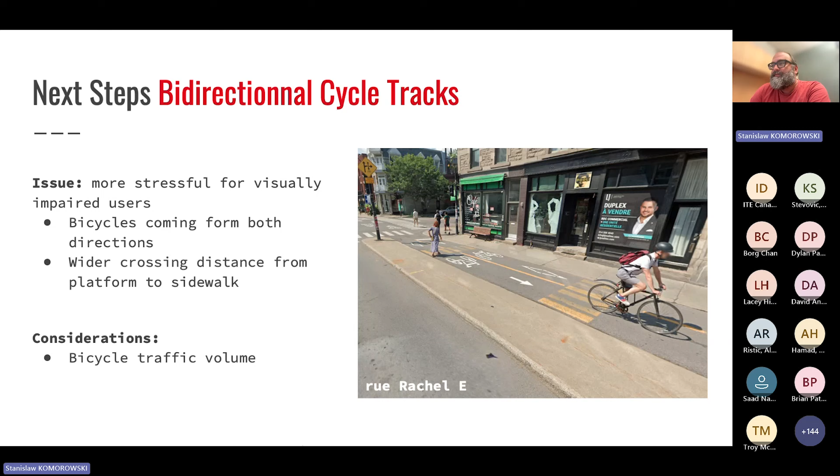And last but not least, we are looking for alternative tactile delimitation devices. So it is very expensive to build all of these cast iron warning indicators all along the bus stops, especially in a retrofit situation, because we have to pretty much reconstruct the sidewalk every time we want to have them on both sides of the bike lane.

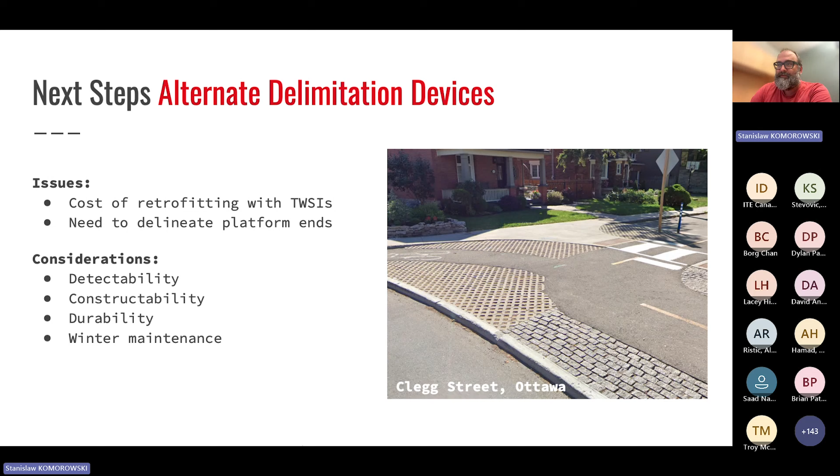So we're looking at alternatives; some of the things we're looking at are these textured pavers or this porous concrete. So we'll see. That's ongoing. Probably in a year or two, we'll have some more guidance on this.